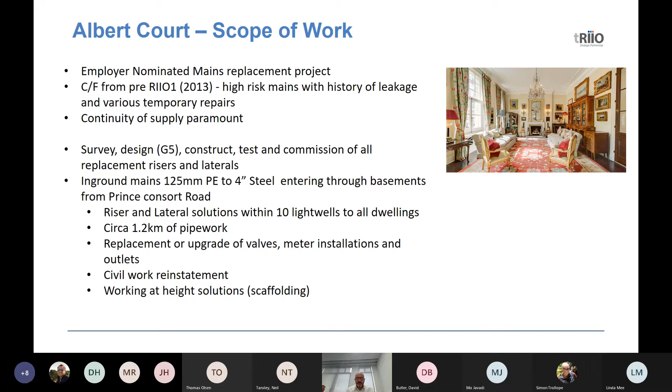We also completed the civil work reinstatement, and with a dwelling 8 floors high and 2 floors deep, there was various working at height solutions, i.e. scaffolding.

Within the scope, and the reason this project took so long to get off the ground, prior to 2013, there were quite significant construction challenges. One of them being the building history and significance.

Albert Court is a Grade 2 listed building, built between 1890 and 1900, designed by a guy called Frederick Hemmings. The curves in the building itself were designed to complement the Royal Albert Hall, as well as the existing Royal Albert Hall mansions.

The public body that protects England's historic environment is Historic England, and we had to go through a process of getting some quite significant permissions over the line with them, as well as full planning permission required from the City of Westminster.

One of the edicts from Historic England, which we'll come back to with the solution we got to iteratively later on, was that as part of the design, we had to land our entry points to each of the dwellings within 300 mil of what the planned approval was. Clearly we couldn't do that without some innovative solutions.

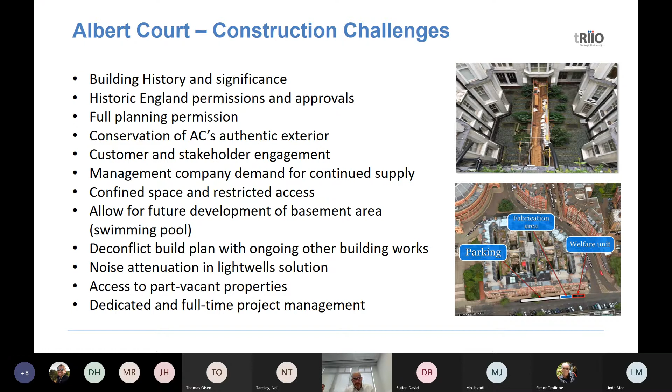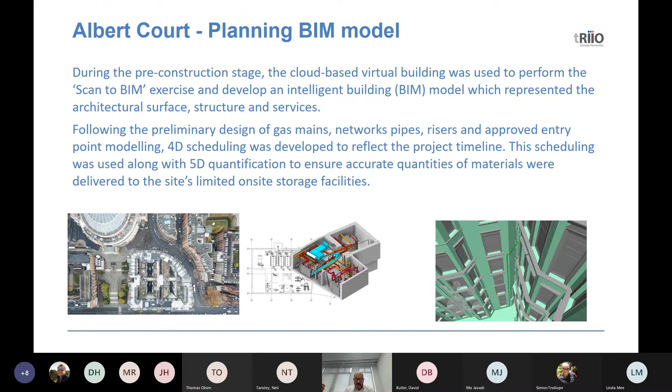As part of that, we looked at a BIM model. During pre-construction, we done a scan to BIM exercise and produced a BIM model. That represented the architectural surface, structures and services. We were able to complete that design of all the gas mains, pipe risers, etc., and use that to produce the project timeline. We also drew off the quantity of materials, etc., and the exact locations of entry points.

So a sample of the BIM model images are shown here, and as part of that BIM modelling, we actually shared that and done a fly-through with all the light wells, all the access points, with Historic England, with the management company, with the City of Westminster, and all affected stakeholders. And there's absolutely no doubt about it that got us the approvals over the line. If we hadn't have done that BIM modelling, that would not have happened, and we would have not constructed that project.

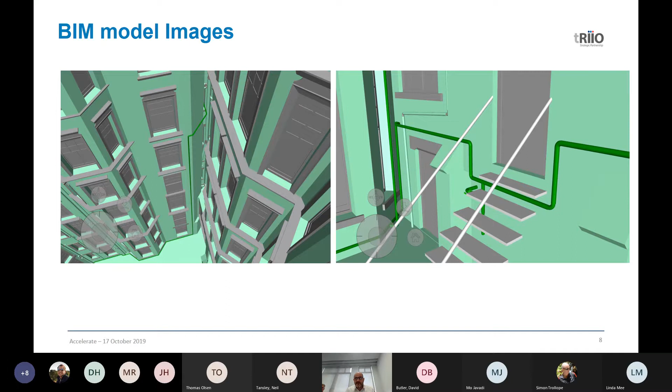The other extract from the BIM was clearly the construction drawings, which, as I mentioned earlier on, is absolutely paramount that the entry points were as per plan, and we managed to do that. Every single one was within the 300 mil tolerance, so absolutely important that construction drawings absolutely reflected the existing site and where the proposed infrastructure was going.

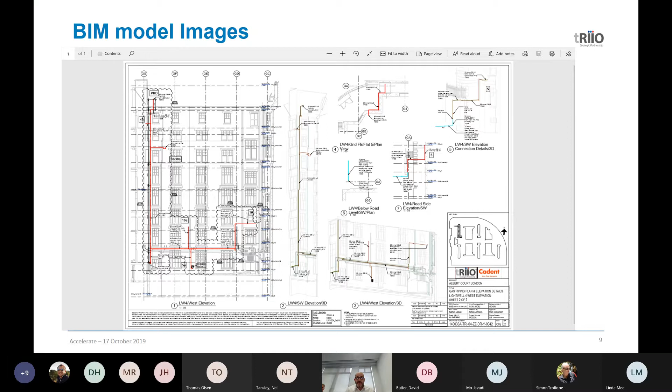In terms of the milestones of the project, it was mooted at the start of 2013. It was 2018 before we got into collectively with ourselves and Cadent around project design and planning, done some risk workshop, and then in early 19 went through project scope, through the project budget, and went through the construction approvals. We commenced in April 2019, and absolutely delighted that on the 26th of November we completed it on time. In fact, we completed it a month early.

In terms of cost-wise, we were 18% less than the budget, with no safety incidents whatsoever. And as part of a 2-day client audit, we got 100% pass, so very, very significant.

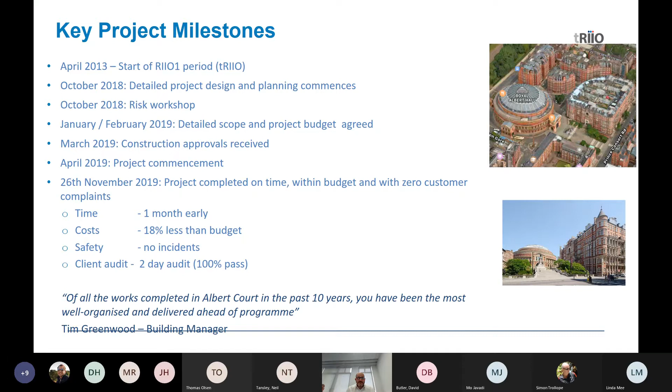I think one of the telling points, though, was a quote that we've got from a building manager, a guy called Tim Greenwood, who deals with a lot of the trades and lots of the interfaces on behalf of the management company. And his quote was, 'Of all the works completed in Albert Court in the last 10 years, you have been the most well-organised and delivered ahead of programme.' And in my mind, there's absolutely no doubt about it, the catalyst to that was the innovative solution we used around the BIM modelling in this environment.

Special thanks to the team, particularly Ian Penny that ran the job, project manager on the job. We wouldn't have completed that on time without Ian's diligence to the process. In addition, Matt Williamson for the pre-construction activity.

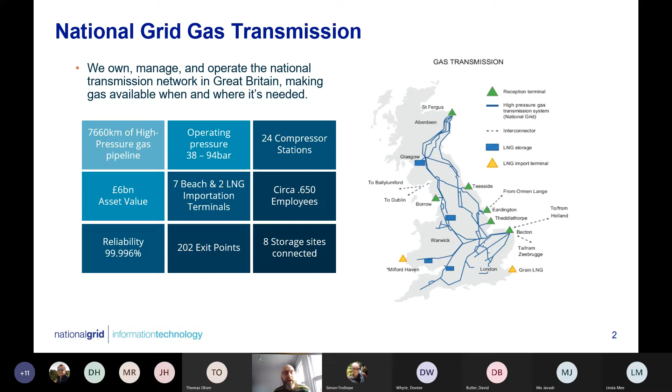So a very important element of the implementation is that we're trying to create that line of sight through from what we need to deliver from a legislation and compliance perspective, what we've promised the regulator in terms of outputs, but also, most importantly, what we've committed to do for our customers.

It's a real challenge understanding how those requirements at a fairly high level actually translate down into real work that delivers those benefits. And as things change, as they inevitably do, work changes, projects slip, we need to do different kinds of work because we get reactive failures, etc. How do all those changes then impact on those commitments we've made to our different stakeholders and customers?

So the proposal for all this is to make sure that we've got that line of sight in place so that any change to our investment programme influences what we do during the rest of the RIIO2 period, but also can we take into account future business plan settlements as well.

So for people who know a bit about this stuff, not everyone, we've been working for a number of years, not just us but the GDNs and the ETNs, on developing a new way for expressing network risk and ultimately being targeted in terms of how we deliver on our network risk performance, called monetized risk.

So monetized risk is a way of bringing all the different kinds of risk, be they safety, environment, availability, reliability, financial, OPEX risk, etc., into a common currency. So we avoid the historic way that we tend to invest in silos. Now we can invest in things that actually deliver the maximum benefits across all those categories. Monetized risk is a way of converting risk into a common currency.

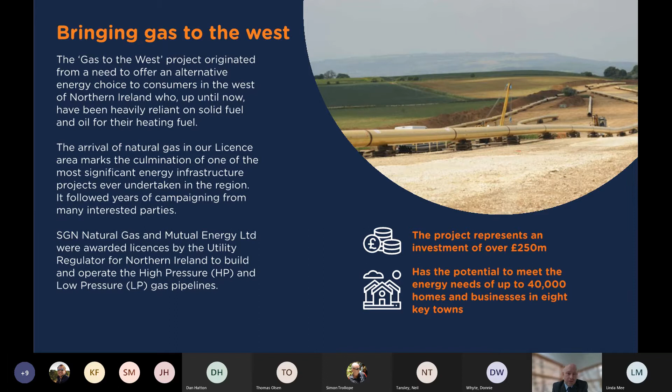A big element for us has been the issue of fuel poverty. Northern Ireland itself has a higher percentage of fuel poverty than anywhere else in the UK, but in the west of Northern Ireland roughly 40% of the population come under the designation of being fuel poor. The final element is to provide a new modern system that will allow us to take advantage as we move into a more decarbonised future, either through biomethane and ultimately through the use of hydrogen in a brand new network.

To give us some context of where it is, we're operating across three counties in Northern Ireland: part of Derry, part of Tyrone, and all of Fermanagh. In terms of population, our licence area is a very rural part of Northern Ireland. It makes up about 42% of the whole country, but has only about 14% of the population.

We've arranged the towns ranging from the very small in Derrylin up to, for us, the largest in Dungannon at 14,000. So a very, very rural population. We will be bringing gas to approximately 40,000 properties and a series of key industrial anchor loads across the area.

In terms of complexity, it's a very complex project linking together both the high pressure and distribution. We worked very hard at the design stage, coming up with an optimum blend of high pressure and intermediate pressure 7-bar pipeline, bringing gas and building the gas out. Essentially, it ended up, as Simon had said, 142 kilometres of intermediate pressure combined with 78 kilometres of high pressure.

The plan now is building out the 200 kilometres of distribution. When we originally submitted this, we were only at the starting stage of distribution, but now we've moved on and have over 200 kilometres of distribution mains built so far, with another 200 kilometres still to go.

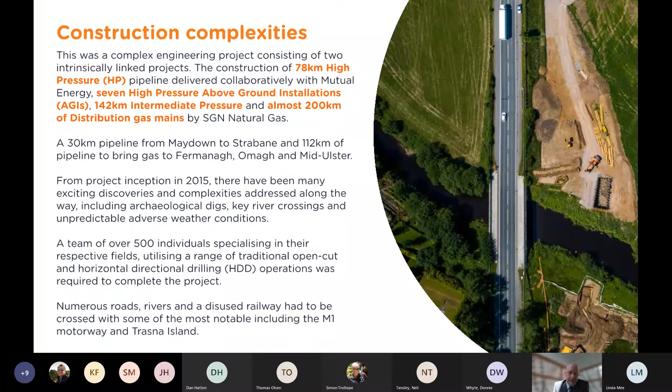As mentioned, it's a fairly complex project. If anybody knows Ireland, the west of Northern Ireland is a particularly wet place, with a significant amount of rain and water courses. In terms of crossings, we had over 50 river crossings to carry out as part of the overall project between the IP and the transmission, many involving directional drilling or auger boring. We also had a series of motorways and major roads to cross, and had to cater for future development of a motorway that will be built through the west of Northern Ireland at some point. We had to take that into account in the design stage, ensuring that anything we build can coexist with the future road when it's eventually built.

This image gives an idea of the scale of one of the crossings, and this was one of the smaller rivers that we had to cross.

An important part of this project is also to provide a clear pathway towards decarbonisation. At this stage, we're putting in a brand new network, fully polyethylene at distribution level, so whatever opportunities come through biomethane or hydrogen, our network will be able to cater for it. Our focus now, though, is on removing thousands of tons of CO2 because we're displacing oil, which is the fuel of choice.

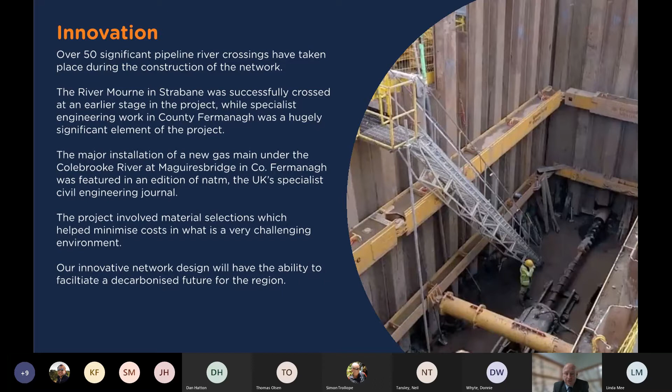Working on any cross-country pipeline or major infrastructure project like this involves a lot of work protecting the environment. A huge amount of our process at the start and planning stage was carrying out extensive surveys of the various rivers, ensuring we carried out fishery surveys, checking that we weren't impacting sensitive areas, or where we were, ensuring that impact was mitigated.

In terms of terrestrial ecology, we ensured that with all the rural wildlife we were minimising any impact we would have, and put together strategies and plans for that.

In terms of archaeology at the design stage, we worked very hard to ensure no direct impact on any recorded historical monuments or historical archaeology. However, we also had to look during the actual construction stage, on the planning stage and into construction, ensuring we were able to react to any archaeology we did come across.

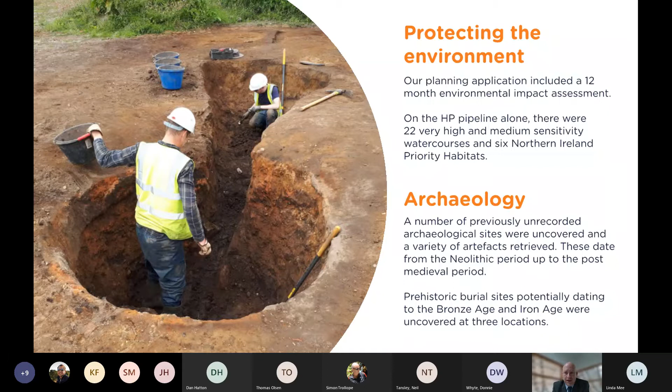At various points we did come across different types of archaeology, ranging from small prehistoric medieval settlements to various artifacts associated with ecclesiastical sites and holy wells, and these have been documented and protected as part of the overall process. We worked very closely with the environmental and heritage agencies during both the planning and construction phases.

To run alongside the HP and IP was the development of a distribution company, SGN Natural Gas, to bring the gas to customers and get them connected. We focused on the 5 large anchor loads that we connected as soon as gas was available, and now we have gas available to almost 20,000 properties, with more coming on stream every week.

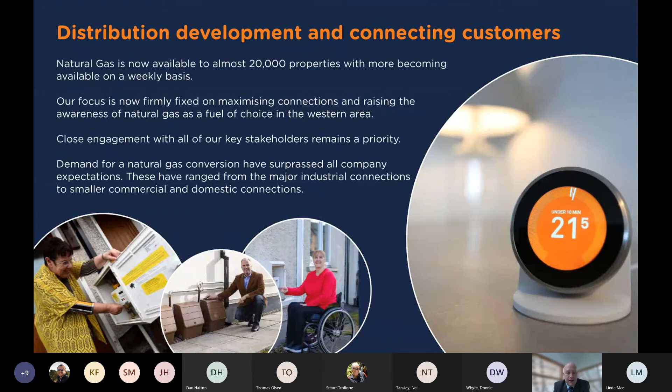Our objective is to maximise the number of connections we can make. As part of this, we've worked closely with our comms agency to develop a multifaceted marketing strategy across TV, radio, print media, social media, and digital advertising. We've also got face-to-face roadshows prepared, and we were very successful in the first year of doing that, though this has been heavily impacted by COVID, so we'll be planning those once the restrictions get lifted.

In terms of giving something back to the community, in order to develop as a new company into an area and give the best opportunity for growing the company, we have to work closely with the local community, providing positive engagement between the teams working on the ground, bearing in mind we do cause disruption as we build out the network, but also working with customers to ensure they get connected. We recognise the importance of meaningful engagement with various groups, be it schools, local angling groups, festivals and so on.

This is a project that will expand as we continue on, and hopefully we will get some additional towns connected to the network as it develops.

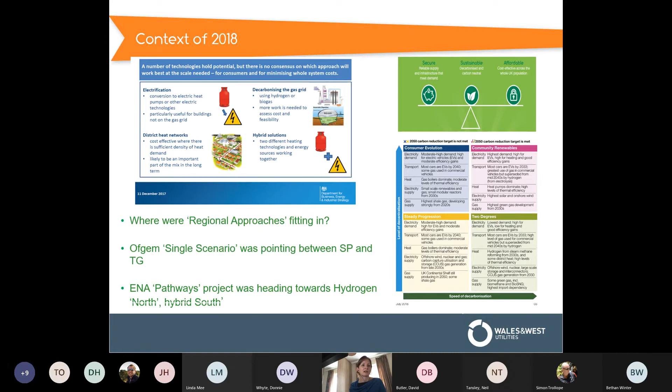So if I go back a step and look at how we wanted to solve this problem, we were seeing a lot of increased interaction on the gas network between gas and electricity back at this time. We then, and continuing, had a whole host of flexible generators, small generators, looking to connect to our system to provide flexible generation capacity for times when wind and solar wasn't available because of intermittency. We also had a lot of green gas, in terms of biomethane, connecting onto our system at the time.

What that told us was that we had to really stop planning the gas network as a gas network in isolation and start thinking of it very much in terms of a whole system.

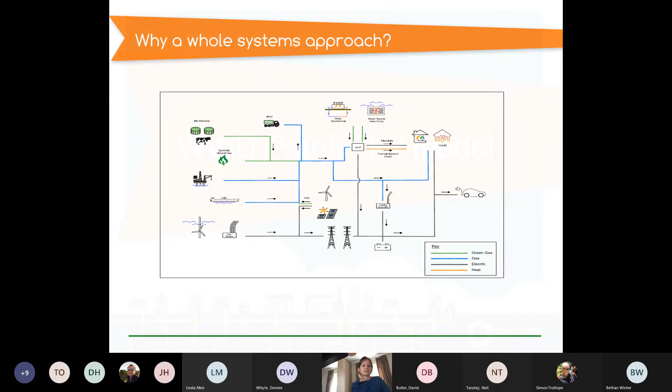So in terms of understanding how that worked, we decided that we would build a model, which we called Pathfinder. We've actually got a Pathfinder Plus version now, but at the time we did this work, we had Pathfinder. The reason we did that - there were a number of models and research used by different parties, and a lot of the models out there are kind of black boxes that you put a lot of data into, it goes off and runs, and then you get some results back. But it's quite difficult to see what they were doing hour by hour, where they were hourly.

We were being asked to support external projects. We needed to do our own research and support planning activities, particularly feeding into our RIIO2 plans. And we just really felt we wanted a whole system model. So we built Pathfinder, and it really progressed from 2015 right up until this version in 2018, and then, as I said, subsequently onto Pathfinder Plus.

But it's a very detailed model. It's in a spreadsheet. I always say it's not difficult, but there's a lot of it - or it's not complicated, but there's an awful lot of it. I think some people would disagree and say it's complicated as well.

But you can see there some of the data that we put into it and some of the things we do with that data. So basically, we start off with demand - heat, light and power - which you'd need for any community, in this case Swindon. We then look at how that energy demand is going to be met, or what's going to be available to meet it. So in terms of electricity: nuclear, wind, solar, tidal, etc., and in terms of gas: green gas and hydrogen. We then look at those data items over the period of a whole year, for every hour.

So we're actually making sure that in each hour bar, we can balance the system and that supply will equal demand, or that we've got sufficient energy storage to account for those imbalances. So we simulate everything over the year, and the outputs we get will be the storage requirements. We'll know whether we've got over generation capacity, for example, and need to constrain generation. We'll understand about interconnector capacity and where we've got interconnectors, whether energy needs to flow in and out.

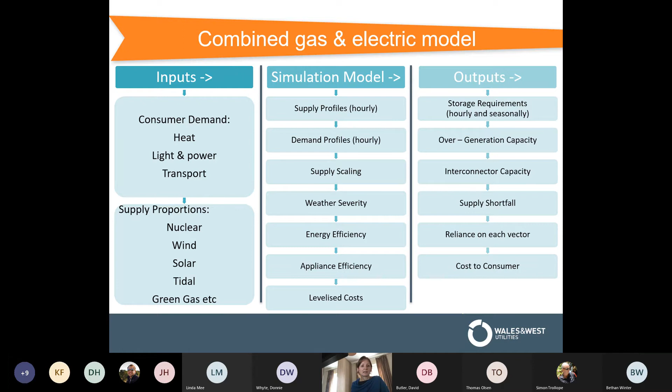Reliance on each vector, and ultimately cost to consumer. So by understanding how each of these generation types and how often they're going to operate, so what the load factors are, understanding the OPEX and CAPEX associated with them, we can then actually recalculate the energy bill based on that new data and that new scenario.

So what Green City Vision did was use that model, but we wanted to look at what the technology trends could be to achieve a 2050 city. At the time, I should also note that we were only looking at 80% decarbonisation. That was the target then.

But we wanted to maximise the synergies between GDNs and DNOs or DSOs, so gas and electric. We wanted to inform our investment strategy for RIIO2 and provide evidence for regulatory engagement. We chose Swindon because it's got a reasonable sized population, representative energy demands and progressive local energy policy. And through this work, we did engage with local stakeholders, so developers, council planners and people like that, just to get an indication from them as to what their plans would be and what their options were.

The approach with the modelling, we started off with a National Grid FES steady progression model, which kind of assumes that you continue as now but don't make any major breakthroughs, and actually you wouldn't achieve even the 80% target with steady progression as it stood at the time.

So what we did, we used that as a baseline, and then you can see the four different areas around the edge that we started. So we said, what if we take steady progression, and then in the case of electrification, achieve the rest of what we need to meet the target just through electrification.

On the top right, what if we do it just through green gas? What if we do it just through consumers on the bottom right, or what if we do it just through businesses taking the action? And then we looked at combining those to look at a proper kind of multi-vector or hybrid solution where basically everybody plays their part and everybody does absolutely what they can to achieve the limit.

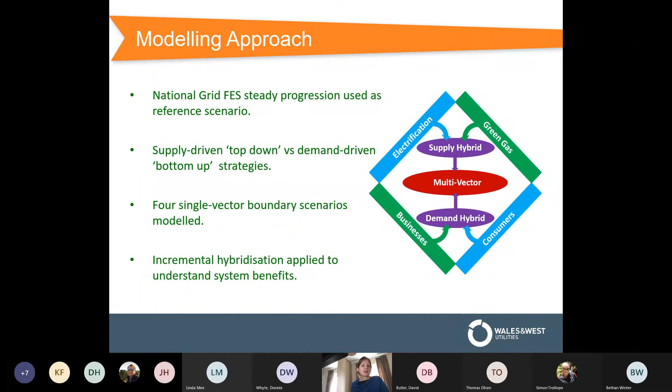And I don't think I'd be giving anything away by telling you that, as you would expect, really, the most effective way we found for decarbonisation to happen was very much that every vector and every consumer out there does have to play their part in this.

In terms of the information that we get out through using the Pathfinder model, we could look at what the 2018 data was for a network, so the average demand, peak demand, which is very important when you're looking at investment and increasing capacity on that network, inertia, which is becoming important for the national grid, so looking at how stable the electricity system is, because with more renewable generation, you actually lose some stability. And then the peak demand change, which tells you the investment you need.

All scenarios indicated an increase in peak and average demand for electricity. I think even if you take away the uncertainty around heat, the addition of electric vehicles is of course going to have a massive impact in terms of what the electricity networks need to do.

Average increases of 50% until 2050, but up to 100%, and grid inertia reduced in all scenarios. So again, really highlighting there that new services might be needed for the electricity networks so that they've still got a stable network to operate.

In terms of the gas network, there was an average reduction in gas demand of 35% over all those different scenarios that we looked at, but there wasn't a single case where you could say you would decommission the gas network altogether. And the reduced demand is very dependent upon home efficiency gains.

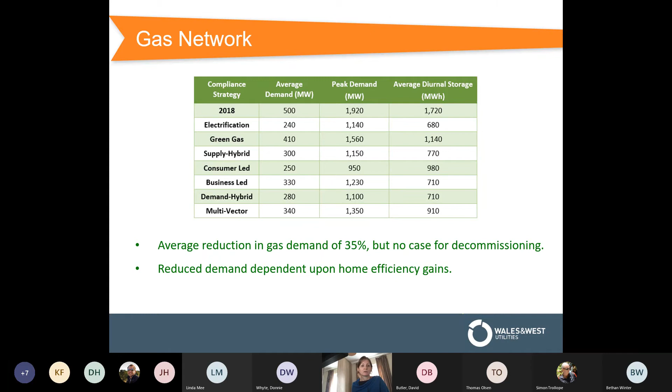So again, I won't go into a lot of detail today, but we really did look at how much investment would consumers have to make in their homes, in terms of financial, for insulation and all those sorts of things. But also, if you really wanted to push homeowners to be the ones that were really supporting decarbonisation, then what level of comfort would they need to lose? So how much cooler would their homes need to be?

In terms of the key conclusions, I'm really sorry, I have rocketed through, but very conscious of time. The key conclusions were that both networks would be necessary for compliance. There wasn't a case made for either to be decommissioned.

The other thinking we had was that supply-driven strategies were deemed to be more deliverable than demand-driven strategies. We could rely on consumers to sign up for insulation, to operate their heating systems in different ways, to look at maybe not using electricity when demand is high. But we felt that really requires not only a massive buy-in and investment up front, but they'd also need to carry on behaving like that. So you'd need to really get that buy-in from the consumers.

In terms of a reliable option, we felt it was best to start on the left here with low carbon gas, which we're already doing, and consumers aren't even aware they're operating on biomethane already. New home efficiency and hybrids was the next one, followed by retrofit home efficiency and heat pumps. Obviously, retrofitting is far more difficult than new homes becoming more efficient. And finally, reduced consumer comfort, which was very much a last resort because of the potential impact on health as well.

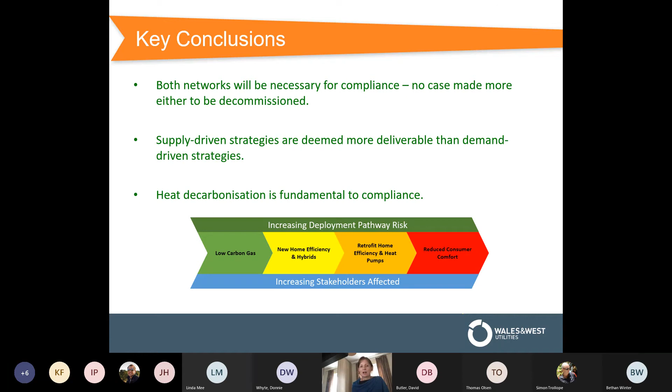So I have absolutely raced through that, but has anybody got any questions? Brilliant. Thank you, Bethan, and thank you for sticking to time.

You talked a number of times about what the network was like at the time of the project. So you said you had a lot of flexible small generators coming on board, biomethane, potential for power to gas. How much has that changed over the last couple of years?

So biomethane probably hasn't increased significantly. I think there's been some uncertainty about the renewable heat incentive, but that's now been replaced by a green gas levy, so we're expecting that to pick up. Having said that, in our network, we've got a waste-derived biomethane plant which we're looking to connect. So the technology is advancing all the time, looking at ways of recycling or turning black bin bag waste into gas, which will actually be excellent for solving another problem as well.

Flexible generation has absolutely continued to take off. I was talking to SGN last week and they said they've connected 53 sites this year. In our network, Wales and West, I think we've got about 40, 50 altogether, with another 30 waiting in the wings. We also started looking at the electricity capacity markets to see what auctions people have secured electricity capacity for, and we can see there's another 30 or 40 waiting there.

So a project we've just done now is looking at how we forecast those generators, bearing in mind how responsive they are. If you think of this as one of our older innovation projects, I'm literally closing down one last week which is looking at how we operate these things in real time.

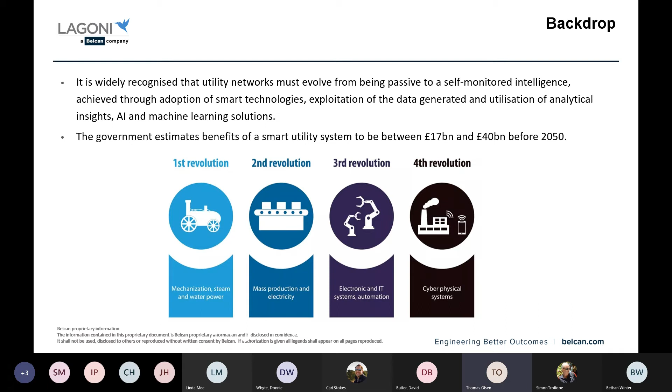The key challenge, though, for doing that is very much around the cybersecurity and the challenges around trying to protect our systems, our gas networks, in a way that allows us still to be cost effective, to operate and connect our systems in the future going forward from where we are today.

A couple of key points that we looked at in this project early on was very much what are the challenges, how can we mitigate them, and how can we be innovative in combating this. When we're dealing with IT systems, we also very much rely on the operational technology systems and their cybersecurity. The challenge is that they are a lot older. The challenge is that when we change one of these components, it has a knock-on effect on the others, and then all of a sudden you're into some very expensive replacement programs. Also, we have built them over decades, so we don't have standardization.

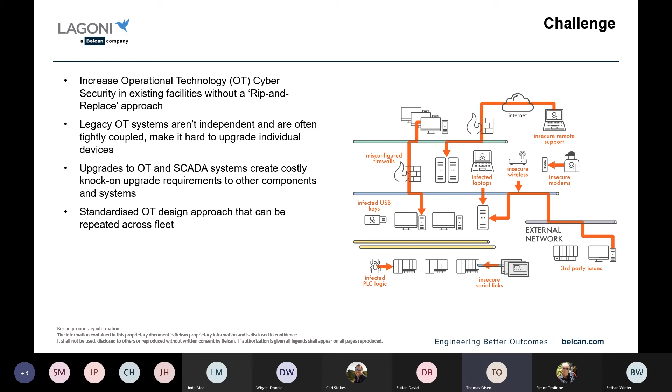So we were trying to combat those threats, and that was really what kicked off the project - at least our thinking. The project itself was focused on delivering a cyber enhancement to an existing infrastructure at a gas compressor station in Scotland. Our focus was very much on looking at the threats, looking at what we can do, and trying to incorporate this within the existing infrastructure at critical national infrastructure level.

So there are some key security requirements that we had to look at. At the same time, a piece of legislation came out that interrupted us a little bit, and we needed to look at this. The operator of essential services regulation was born earlier at the beginning of the project, and we're very much regulated by Ofgem, BEIS, and NCSC. So all of a sudden there were some other stakeholders involved.

But ultimately, this is about cost reduction, being effective to introduce this so we can enable the digital transformation journey and get data out of our assets, control them better, manage them better, and ultimately drive efficiencies toward net zero. That was very much the scope of the project at the time. That evolved over 3, 3.5 years, and really what we were looking at was some of the really old systems and how we could improve that.

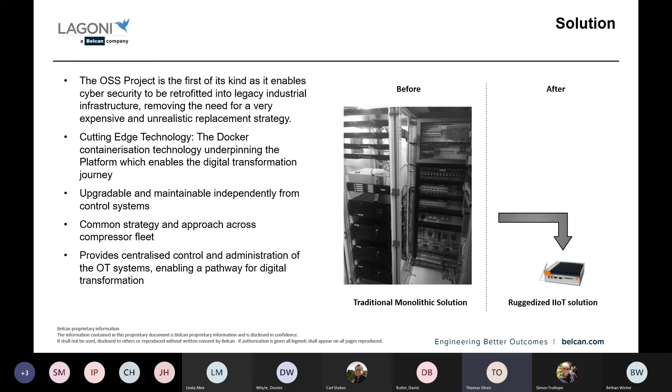So we've seen some really positive steps from this, but ultimately it provides this idea of centralized control and ability to administer these applications, future-proofing it so that if we want to do things in the future we haven't thought of yet, we don't have to rip everything out. We just deploy a new application, under the right standards and G17 and G35 processes. That's really where we're trying to get to.

So just very quickly, the outcome of where we got to. We started looking at this on a single compressor station - it's been running there now for 2 years. What's happened since we submitted this application is that it's now part of the rollout program for T2 for National Gas Transmission. So this is the principle that's being used, which we're extremely proud of because it's taken a long time to get there. But really, the adaptation of this thinking and technology can now be applied by anyone, not just ourselves.

So it's disrupted the way we would have traditionally delivered these projects. It's a modular piece of software, effectively a modular software application, and we can use existing or off-the-shelf hardware. So it breaks this idea of having to go to a specific vendor, and it can all be controlled. But it's all about enabling real-time data flow out of these facilities, so we're able to do some clever analytics in the future on proper real-time data.

We had a huge cost reduction because we made it smaller, and it was simpler to install. We had some really significant cost reductions, and also the target was to increase the security scoring on these facilities along with the compliance, and we definitely achieved that.

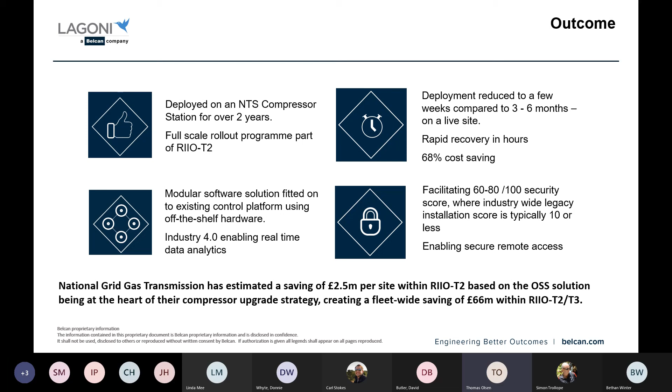We're very, very lucky to be part of this project, and I think it's been an excellent showcase for the security industry to see how things can be done as a service rather than as a product. It's been exciting to be part of this journey. I'll hold it there, Simon - happy to take any questions.

That's brilliant, thank you Thomas. Question for me - this is obviously being applied initially to compressor stations. Can it apply to other assets as well? The answer is yes.

I think we talked about this when we presented at the actual live conference a couple of years ago, early doors, where we were looking at that. So the answer is yes - we managed to get it down in size so that we can now use this principle for others. In the last 6 months, we've actually been working with the electricity side as well to apply the same principle. We've got a couple of in-flight projects with some test facilities to really try and apply this in their domain.

The only difference is the types of systems that we are connecting to - the security principle is still the same, and the idea of being able to put this into a smaller substation in the future is very much very exciting.

Brilliant. So you talked about the rollout happening as part of T2 and T3 - is that just initially in compressor stations, or are you rolling that out into other assets, or is it too early to say in terms of the detail at the moment? The commitment at the moment is for compressor stations.

That's the specification that we've seen being changed. So the current architecture shows this solution being applied. We're very much seeing this being compressor station to start with, and then see where it takes us. But it's a very good place to start, I would suggest.